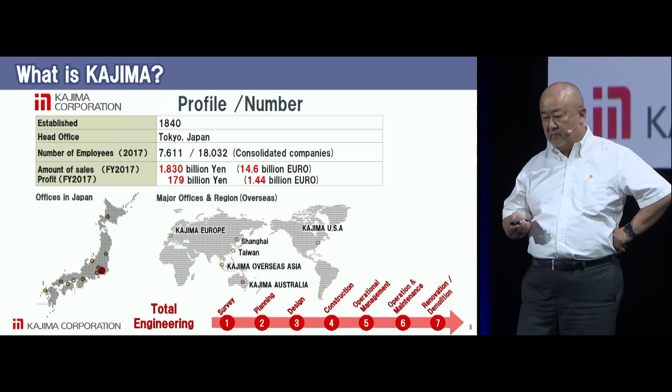I would like to show some of our major works in Tokyo. Many of them were completed within the last year.

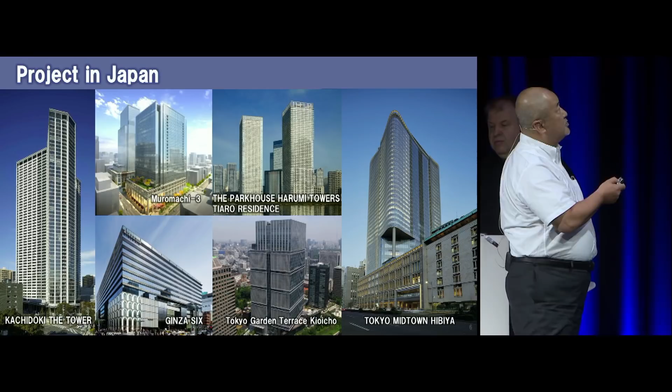From left above, clockwise: Kachidoki the Tower, Muromachi Project, the Park House Harumi Towers Tiaro residence, Tokyo Midtown Hibiya, Tokyo Garden Terrace Kioicho, Ginza 6, and so on.

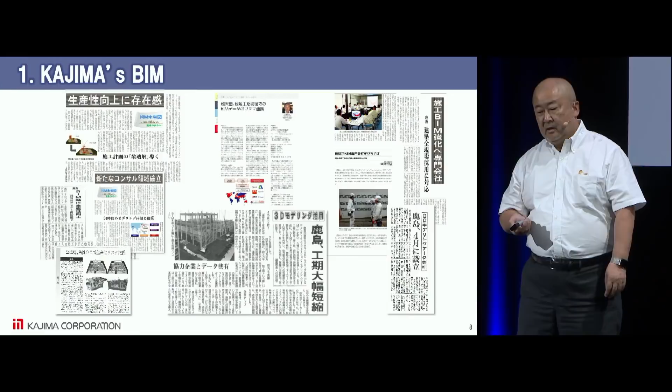From now on, I would like to talk about Kajima's BIM. There are some articles published in newspapers. Our BIM has gained attention widely in Japan and also all around the world.

Improvement of productivity, large-scale project with short period accomplished by BIM. Established BIM company in April 2017. Shortening of construction period, and established BIM supply chain.

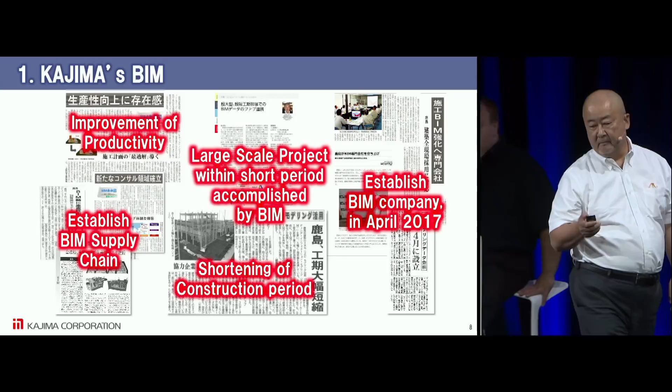Actually, we also have an official role to promote Open BIM internationally. As you might know, we are a member of the Strategic Advisory Council since 2016 of buildingSMART International. Nemetschek is one of the oldest members of SAC, and Kajima was the first company from the construction domain, followed by Arup, Holcim, the Chinese railway company CRCC, and the German electronic giant Siemens.

It allows that BIM is spreading not only among construction companies, but in relation with IT and IoT as well.

Let me explain our activities in the last half decade, starting from 2012. The three arrows indicate the three main directions. The first arrow, construction BIM—we started 5 years ago, and now it is well known to the public.

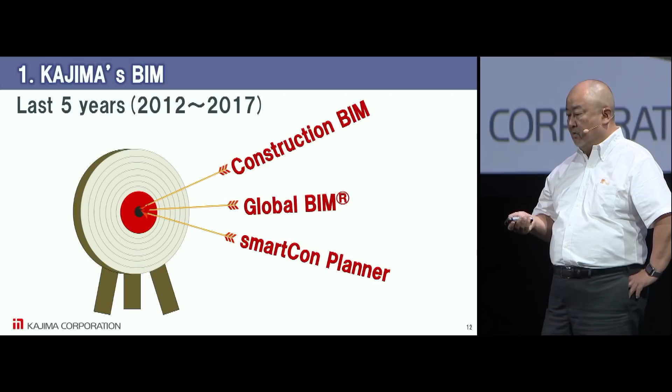The second arrow, global BIM, which is targeting BIM modelers all over the world to achieve just-in-time modeling. This is where our company got its name from. And the third arrow, smartCon Planner, is targeting site engineers to simplify construction planning.

I will explain those three one by one. Construction BIM is based on the theory called the Yajima curve. This chart shows the effort in each phase of the construction project.

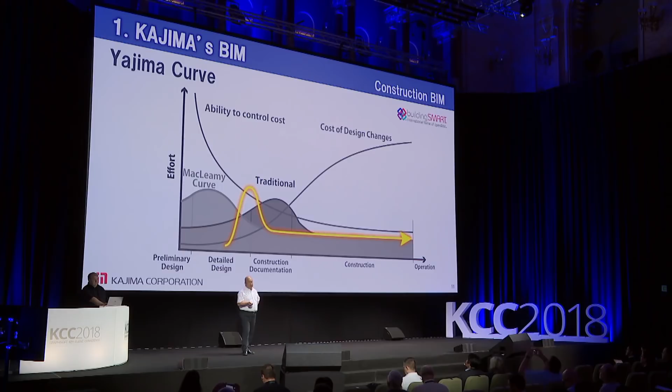Patrick MacLeamy, the chairman of buildingSMART International, proposed this effort curve, well known as the MacLeamy curve, showing the typical effort curve of an architectural design firm. The Yajima curve, proposed by our leader Yajima, shows how a construction company has to change its effort when introducing BIM.

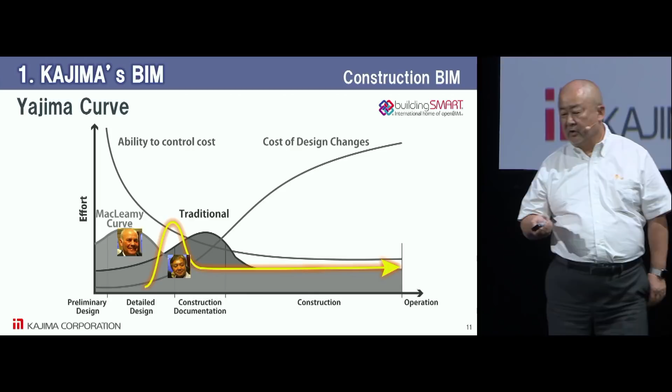That is, a relatively large amount of effort is needed at the time between the design and the construction phases. And this curve has been proven true in Kajima's BIM construction projects.

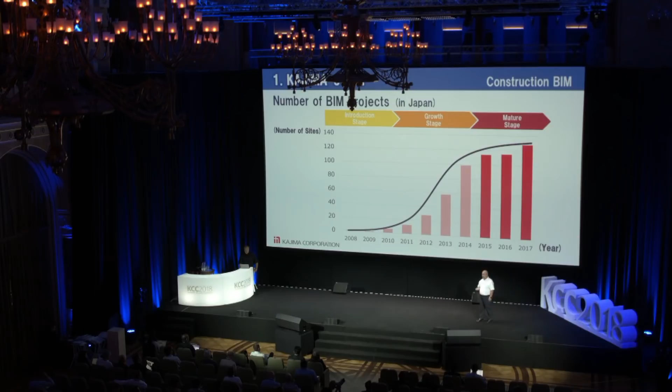You can see this chart indicates the number of Kajima's BIM projects in Japan. As a result of promoting construction BIM, in the last 3 years, we have achieved 100% adoption of BIM at construction sites. The construction period of each project is about 2 or 3 years, so the actual number of operating sites using BIM is about 300 or more every year.

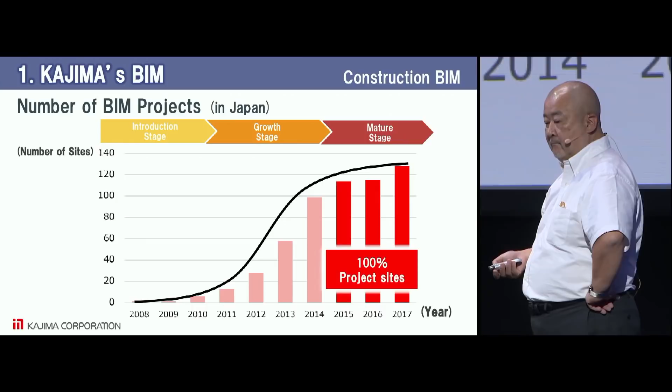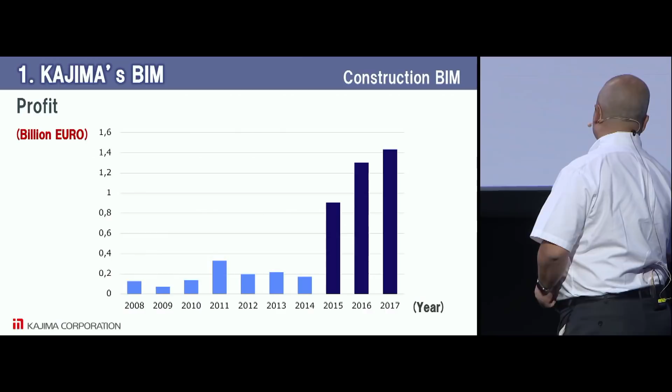At the same time, in the last 3 years, our profit has grown considerably. This chart indicates the annual profit of Kajima's in Japan. It's obvious that BIM has contributed to our production system directly and boosted our profit. You can see our growth curve has gone up quickly in the last 3 years.

The second arrow is global BIM. It's a collaboration platform on a cloud network. We started to use it in 2013. As you know well, it is based on GRAPHISOFT's BIMcloud solution. Using this platform, as many as 30 people can work together on the same file simultaneously.

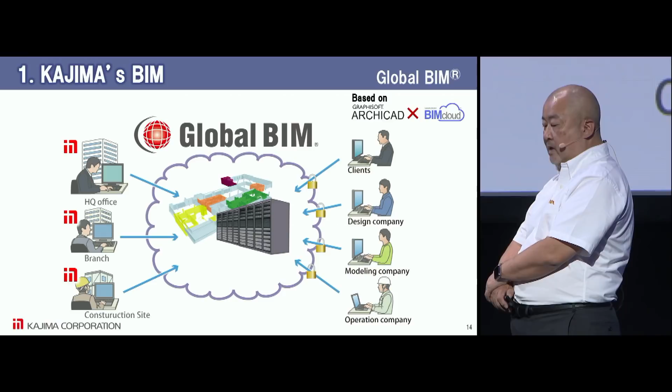This is our modeling network based on global BIM. We call it supply chain, using the same term Japanese car manufacturers introduced worldwide. As I mentioned at the Kajima curve, we put a large amount of effort into the handover phase between design and construction.

And within this phase, we mainly create BIM models from 2D drawings by working with modelers. So even if it's a large-scale BIM model of a high-rise building, we can finish it in only 1 or 2 weeks. Therefore, we can deliver BIM models to all of our construction sites at a low cost.

Global BIM has changed our work style as well. We have involved skilled mothers at home, and we call them BIM Mamma, or BIM Papa. But this idea doesn't only apply to working mothers, but also to students, experienced retired engineers, and many other types of people as well. We think the work style should be more flexible.

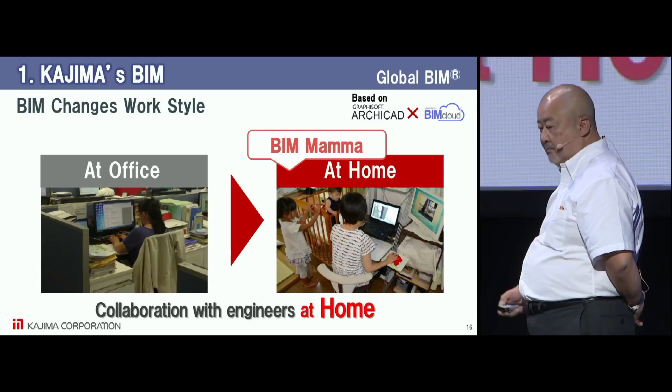And we try to introduce various alternatives. The third arrow is a product: smart construction planner, which we call smartCON Planner, or SCP. Construction planning is an essential know-how of a general constructor, and it should be done by construction engineers themselves, not operators. So we developed SCP to make it easy. The system is now distributed by Global BIM Corporation in Japan and South Korea, and we plan to sell it in other countries as well.

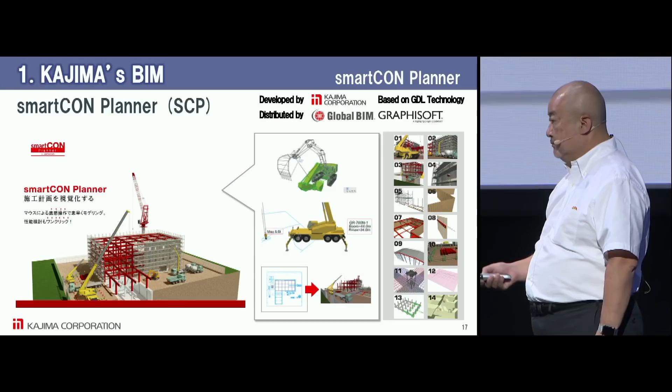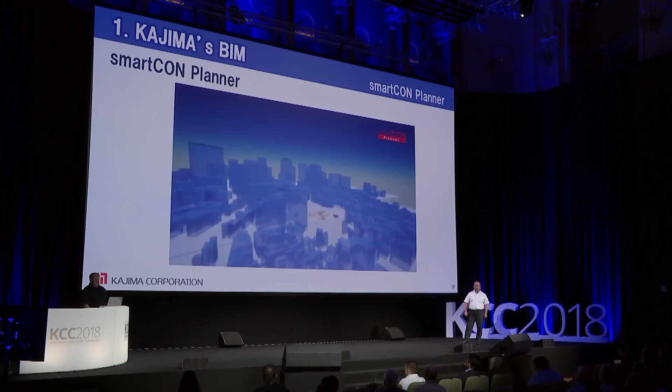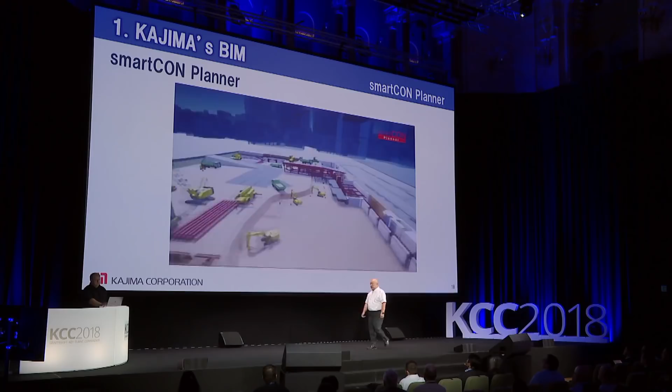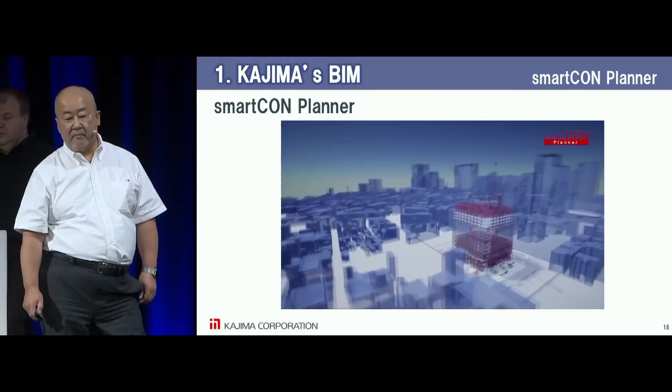Now I would like to show you the video which you can also see on YouTube website. It's our smartCON Planner. smartCON Planner is developed using GRAPHISOFT, GDL, and API technologies. The purpose of this software is to enable the site manager to efficiently create construction plans using BIM.

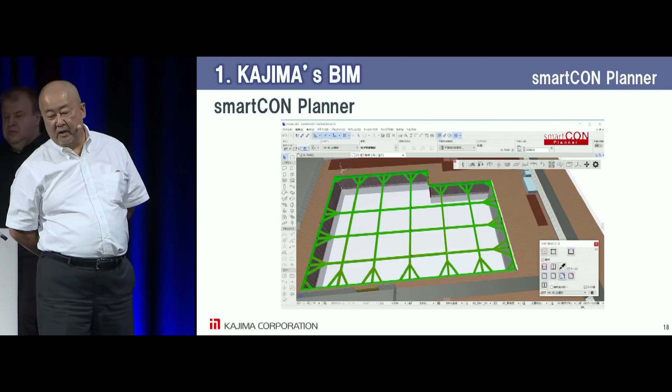In addition to cranes, trucks, and heavy machinery used at the site, temporary enclosures, temporary scaffolds, temporary shoring, and struts are also provided. Let's move. Easy to layout. You can see.

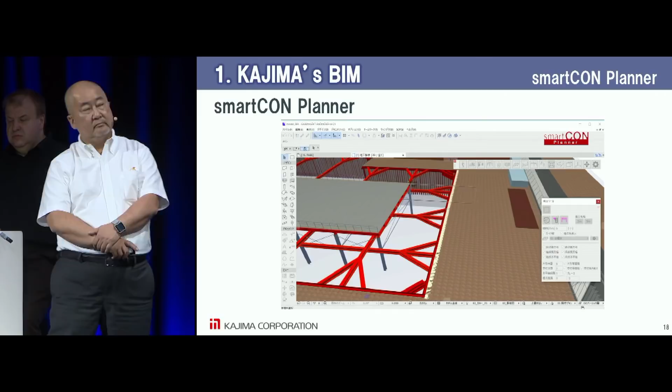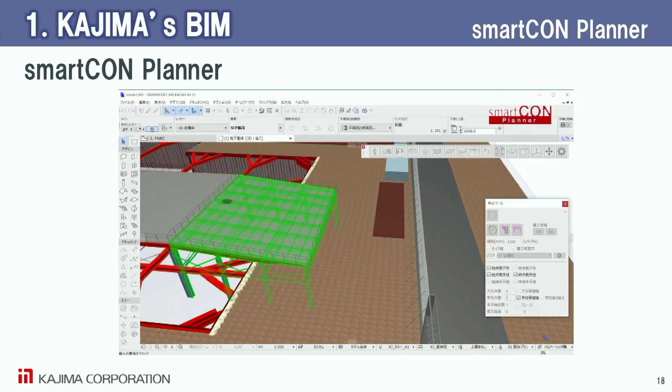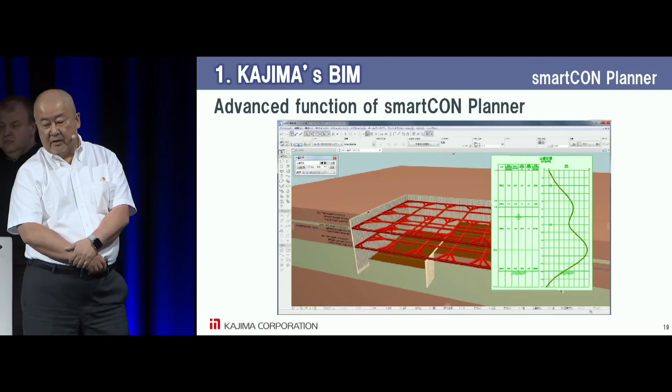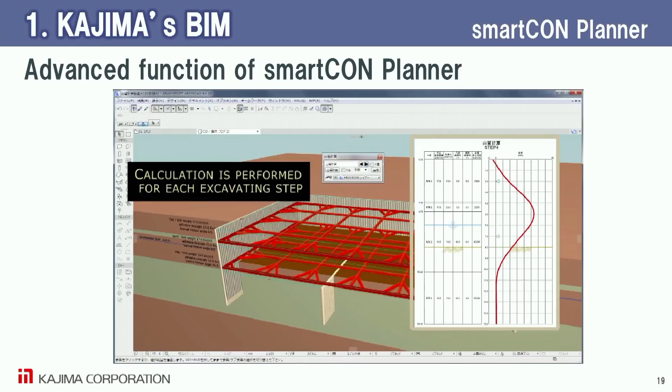And we can show you the other movies. This is a second stage SCP. We have added more advanced features recently. Underground work is based on the geological data obtained by boring and requires highly advanced engineering ability and experience. Kajima has been developing such software, and now we can use it together with smartCON Planner.

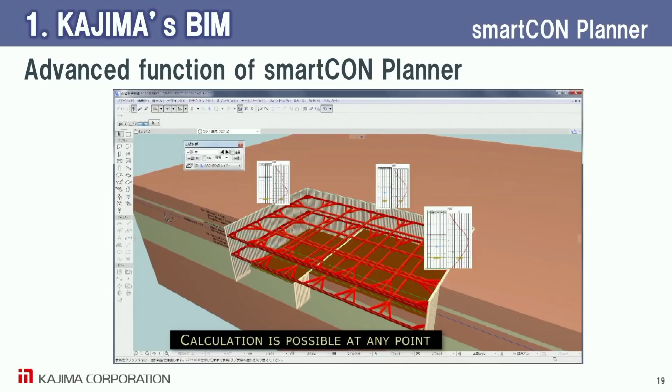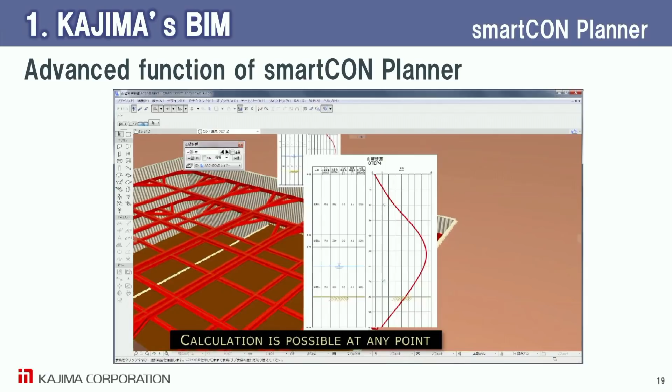The next example is BIM for public services. We can extend shared values in public areas. Now IFC is extended to the infrastructure area. It means information on a building and its infrastructure will be handled on the same platform. Combined with GIS, BIM could be used much more widely in relation with public service.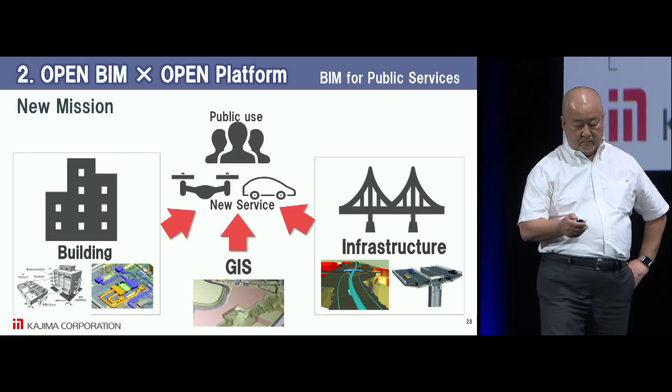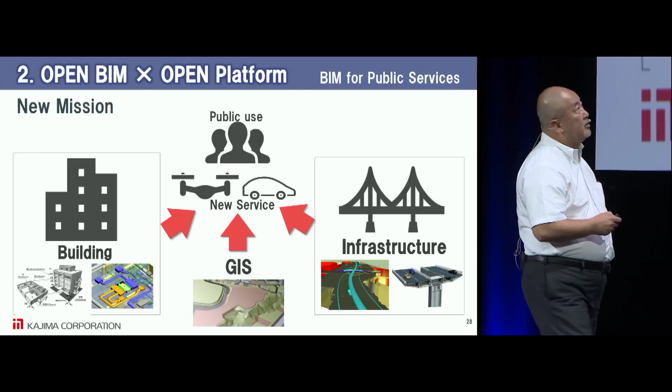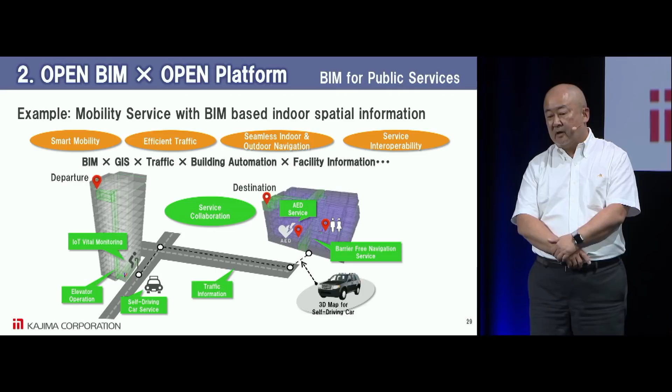It's integrated. This shows the process of elderly people leaving their home and arriving at their destination. By linking building and indoor BIM data with elevator operation information, traffic information, and health monitoring information from IoT, people can be safely and efficiently escorted to their destinations.

Finally, I'd like to talk about the collaboration between BIM, IoT, and AI. IoT is an essential piece of technology to implement the thing which I mentioned earlier. IoT's role is to connect the BIM data of buildings and infrastructure to smart devices, drones, automatic driving cars, and public transportation. IoT plays a role of linking the cyberspace and the physical space.

This figure shows what we are trying to do as a construction site: acquire materials information to procure from BIM data and deliver them to the site just in time.

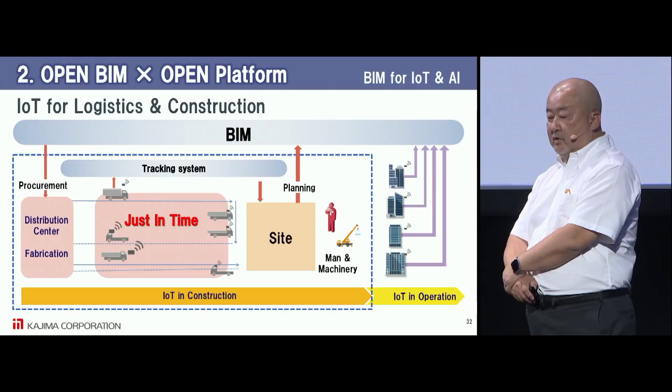In the operation phase, IoT sensors embedded in the building can monitor the building and upload data to the server to manage the latest building status on the BIM model. A number of gateways and beacons are installed at the site to provide real-time monitoring of equipment and workers. For example, hand pallets, steps, hand cars, and work vehicles are covered objects, and IoT sensors are attached to them.

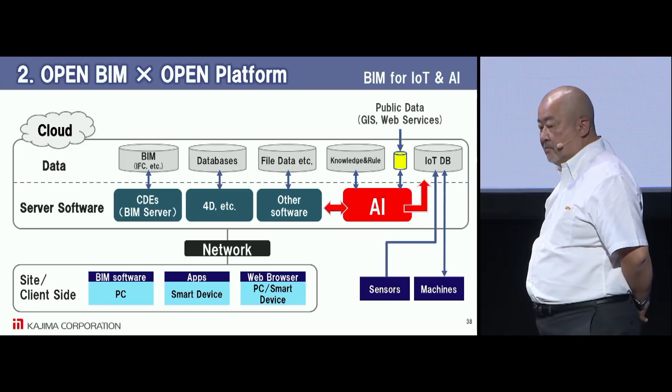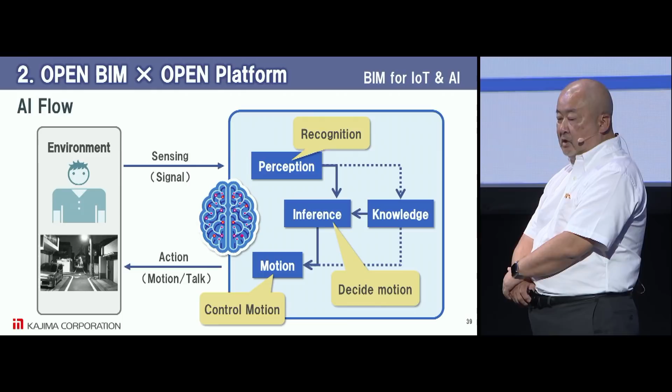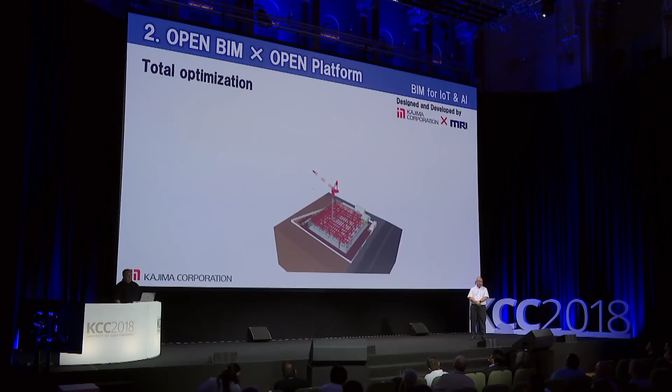And moreover, we try to use this big data for AI. By combining real-time information obtained from IoT sensors with stored big data, we intend to create an automated construction system. At present, the site managers develop a process plan using the BIM model, but in the near future, AI will automatically generate various plans which we can compare and select from.

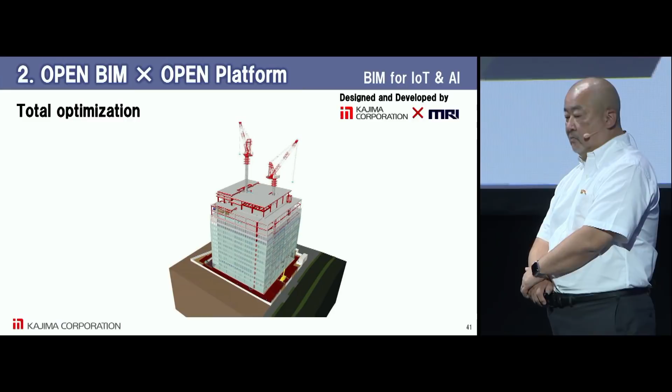I have introduced various possibilities regarding Open BIM and Open Platform. Now I want to conclude my presentation. We have been working to utilize BIM in the construction phase. It was important to use a variety of BIM software and share data between them using IFC.

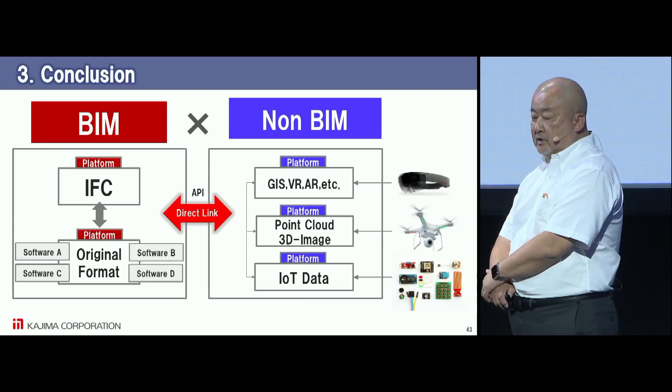However, to utilize BIM data further, it is necessary to work with non-BIM data as well. Use of BIM is dramatically expanded through the integration with GIS, VR, AR, drones, and IoT sensors. Therefore, an open platform is required along with OpenBIM. And we expect GRAPHISOFT, which has been leading OpenBIM, to drive this process.